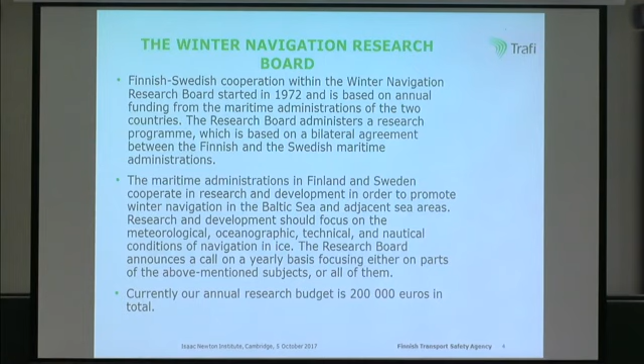The research and development which we are funding should focus on the meteorological, oceanographic, technical and nautical conditions of navigation in ice. The research board announces a call on a yearly basis, usually in early summer, focusing either on parts of the above mentioned subjects or all of them. Currently our annual research budget is about 200,000 euros in total.

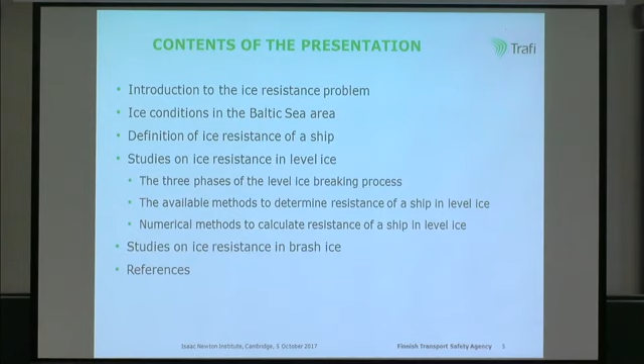Here you can see the contents of my presentation. I will first give a short introduction to the ice resistance problem, show a picture of ice conditions in the Baltic Sea area. I will discuss the definition of ice resistance of a ship, and two issues are the main subject: firstly, studies on ice resistance in level ice, and then I will also present one study on ice resistance in brash ice.

In practice, ice resistance of a ship can be determined by tests made in full scale, by tests made in model scale, by using calculations, by using empirical formulas, and also by using numerical methods based on physical models. Model testing and use of empirical formulas are important to ship designers, whereas the scientific community is more interested in developing real physical models. Full-scale testing is important, both for verification of empirical models and physical models.

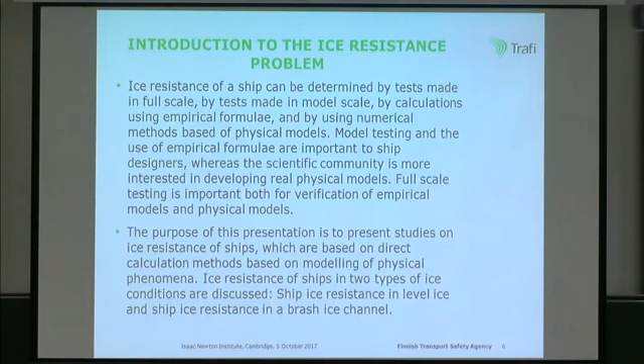The purpose of my presentation is to present studies on ice resistance of ships, which are based on direct calculation methods, based on real modeling of physical phenomena. Ice resistance of ships in two types of ice conditions are discussed: ship ice resistance in level ice, and ship ice resistance in a brash ice channel.

In this picture you can see an ice chart made by the Finnish Meteorological Institute showing typical ice conditions in winter time in the Baltic Sea area. You can see Finland over there, Sweden, Denmark, Germany, Poland, the Baltic Sea states and the Russian Federation.

And as you can see, in this case, all the ports along the Finnish coastline are surrounded by ice. That is the reason we need several icebreakers to assist cargo ships to our ports during winter time, and also why there has been special interest in research of winter navigation in Finland.

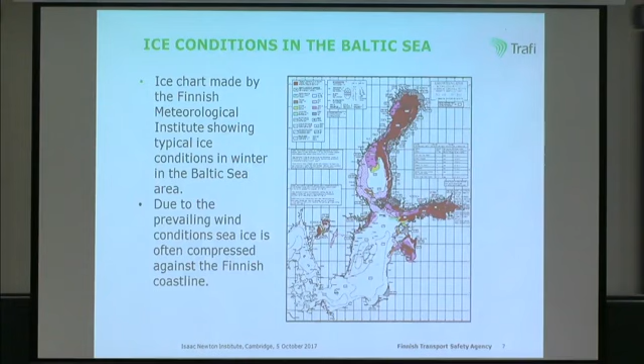The reason that the ice is usually packed against the Finnish coastline is that during winter time southern and southwestern winds are the prevailing wind conditions. That is the reason that usually ice conditions are heavier along the Finnish coastline compared, for example, to the coastline of Sweden.

In archipelago areas where we have fairways, we have brash ice conditions. If you have a fairway and ships sail through the same fairway during the winter time, we get this kind of ice rubble, which consists of different sizes of ice pieces, usually with a rounded shape. During the winter period more and more ice accumulates in the fairways, and that's a certain obstacle for shipping as well.

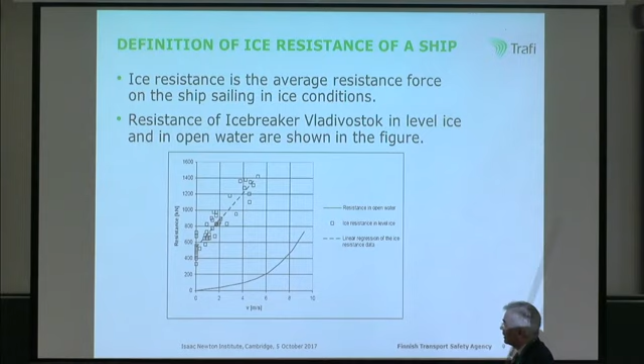Some words on the definition of ice resistance of a ship. Ice resistance is defined to be the average resistance force on the ship sailing in ice conditions. In this picture we can see ice resistance data from full-scale tests for the Russian icebreaker Vladivostok. These are the measurement points. We can see that there is a certain scatter in these results, and usually the ice resistance is assumed to be linear, averaging the measurement points.

So the ice resistance is linear, at least at relatively slow speeds, whereas the open water resistance curve shown here is non-linear, especially at higher speeds.

In Finland, usually the idea has been that ice resistance is separated from open water resistance. So if we have total resistance in ice, we subtract the open water resistance from the total resistance and get the ice resistance.

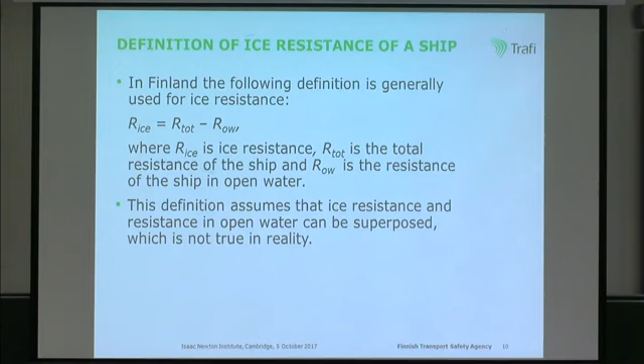This definition assumes that ice resistance and resistance in open water can be superposed, but actually this is not quite true, although the error might not be that big, because the open water resistance usually at very slow speeds is not very high.

Level ice seldom exists at open sea because the ice field is in continuous motion due to wind at open sea, but we have level ice in the archipelago area. For ice-breaking ships, the highest speed of a ship in level ice is an important measure of the ice-going capability of the ship, and this is very often defined in the ship's contract.

For example, the ship may be required to break 1.2 meter thick level ice with a certain bending strength when the speed of the ship is 2 knots. This is a very typical definition in a ship's contract.

We can separate several phases in this level ice breaking process. When the ship is approaching the intact ice sheet, the ice sheet is first broken. We call this the breaking phase. Then this broken ice floe is rotated so that finally it leans against the hull. This is the so-called rotative phase, and then after that the ship is gliding over this broken ice field, and we call this the sliding phase.

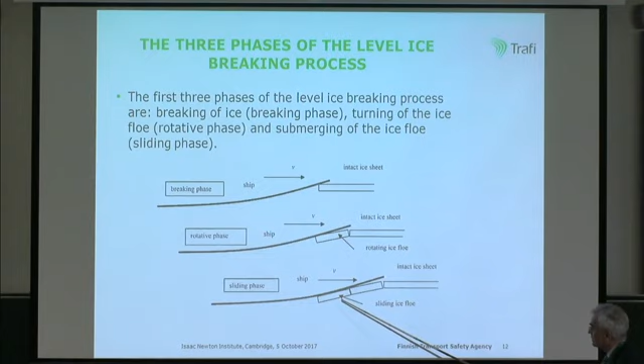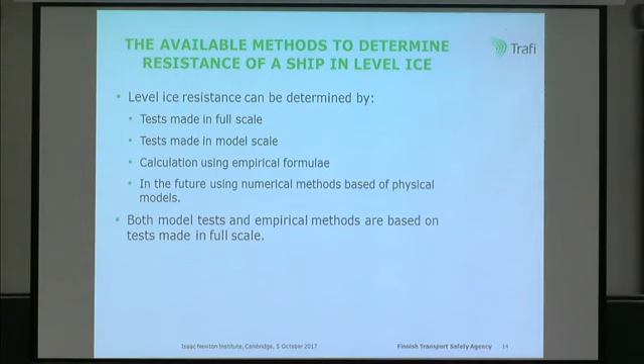As I mentioned, there are several means to determine the resistance of a ship in level ice. But now I will discuss numerical methods to calculate resistance of a ship in level ice.

Petri Valanto did pioneering work in this field at the end of last century. Later on, Fernando Puntigliano made some tests and also a thesis on the issue concerning the sliding phase. And also I made my thesis in 2007 on the ice sliding resistance.

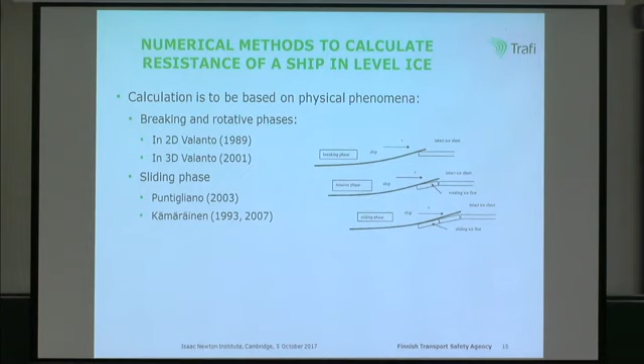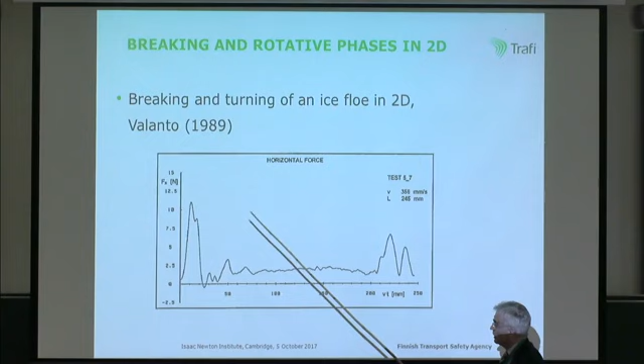Valanto made tests in 2 dimensions first, and here we can see the time history - actually this is the distance of the advancing ship - and here we can see the force when the ship is hitting the ice field and the ice is broken first. There's a huge force peak, and then this part of the figure represents the rotating phase, and the second force peak is generated when the ice floe hits against the hull.

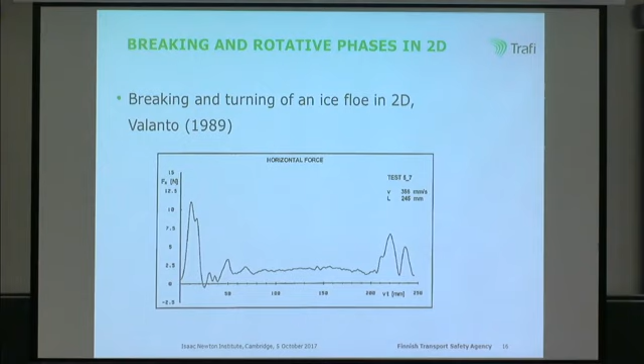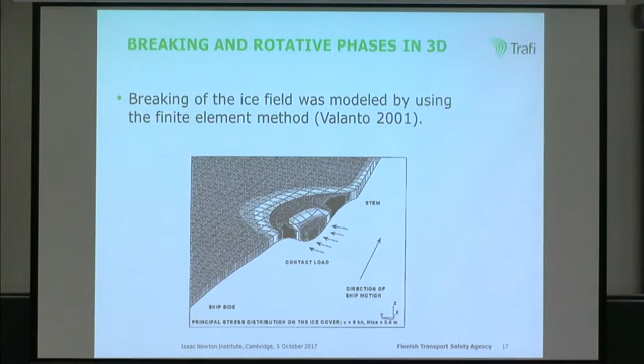So this type of force occurs in the ice breaking and turning phase. Later on, Valanto also made a 3-dimensional model so that the ice field was modeled using the finite element method, and the ice breaking was modeled in this way, and then fluid mechanics was applied to model the flow of water below the ice field and the ship.

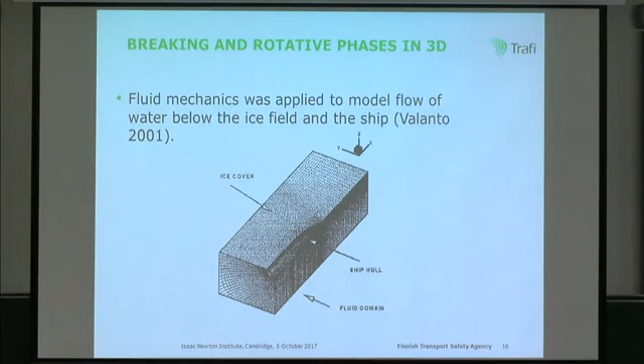So Valanto got certain results which did show a very good relationship with full-scale data. We have full-scale data resistance points here, these red dots. The lowest curve is actually an empirical curve indicating the ice sliding resistance, and the other curves represent certain forces due to the ice breaking, rotating phase, and when the ice floe hits the hull and so on.

So actually Valanto was able to model these phenomena, but he didn't discuss the ice sliding phase, which still remained an unsolved issue at that time.

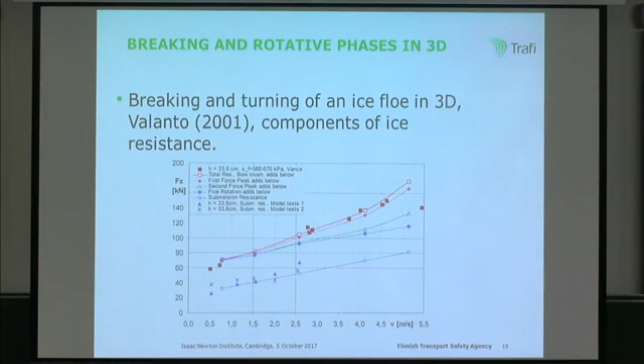Then later on, Puntigliano made model tests with a segmented model. He had a landing craft bow here, and he divided the model into several segments, and he had force transducers in these separate segments so that he could measure ice resistance for each segment.

He also had pressure transducers on the other side of the model where he could measure the pressure between the hull and the sliding ice floes in the ice sliding phase.

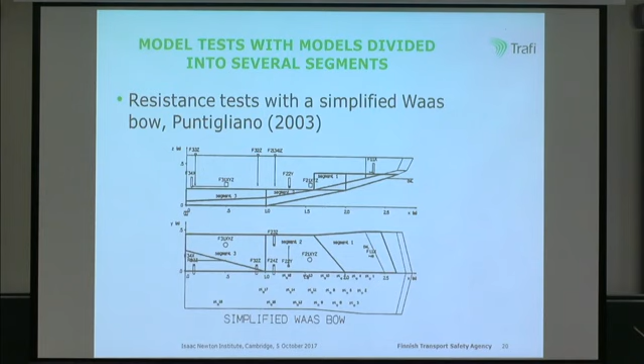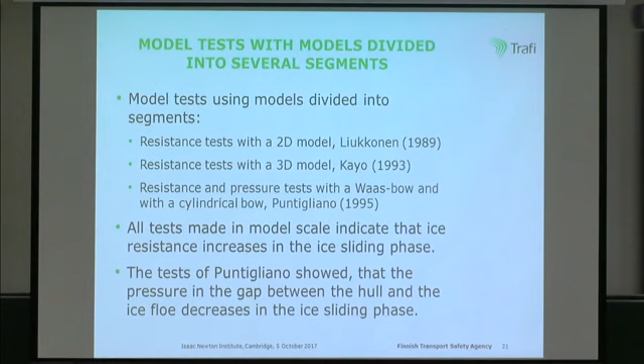Also, some other people made similar kinds of tests, and all tests made at model scale indicate that ice resistance increases in the ice sliding phase. Tests by Puntigliano also showed that pressure in the gap between the hull and the ice floe decreases in the ice sliding phase.

Now there are different theories indicating why the pressure changes in the gap between the hull and the ice floes in the ice sliding phase. It may be due to a change in geometry of the hull as the ship glides over the ice floes, and also inertia forces were indicated.

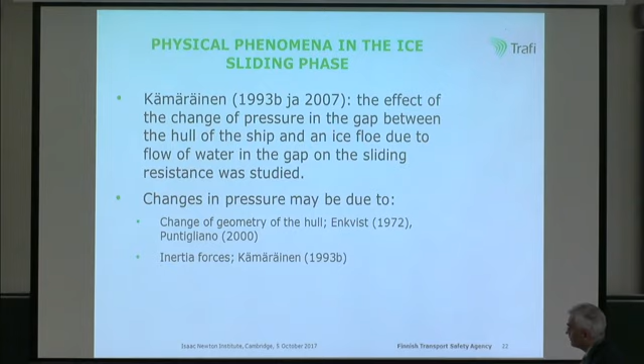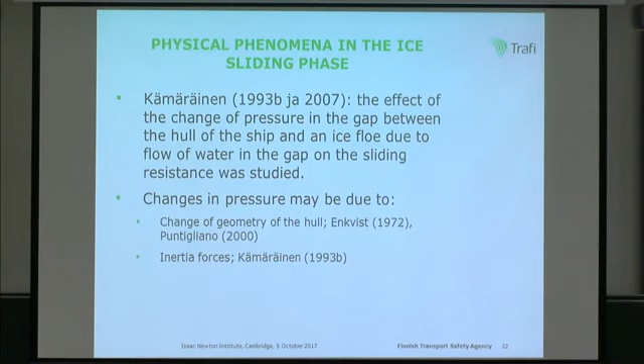I made a hypothesis in 1993 that inertia forces may be relevant, or should have to be taken into account, when pressure between the hull and the ice floes is calculated.

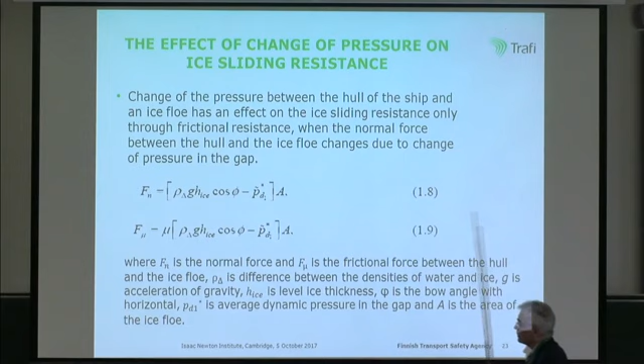If there is a pressure decrease between the hull and the ice floe, we have this PD here. We have the static pressure, which is the lift of the ice floe leaning against the hull. If the pressure difference is negative between the hull and the ice floe, then we get a higher normal force, and due to the higher normal force we get more frictional resistance. That might be the reason for additional resistance due to the flow in the gap between the hull and the ice floes.

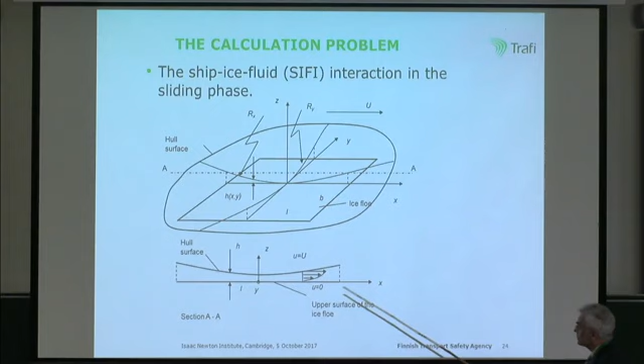Here we can see a section of this, the above figure. Here we have the hull, and here is the ice floe, and there is a certain flow generated by the movement of the hull above the ice floe. So the problem is to calculate what kind of flow actually exists in the gap.

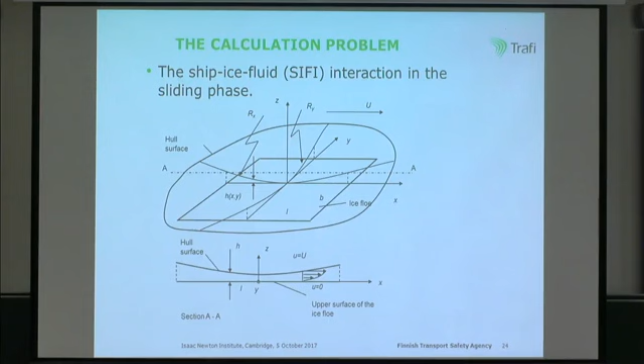I started from the Navier-Stokes equations, which were simplified by neglecting the momentum equation across the gap, because the gap is really small compared to the other dimensions. The remaining equations were integrated across the gap, giving the equations of Constantinescu. These are actually equations used in lubrication theory for special types of lubricants where inertial forces and also turbulence have to be taken into account. Usually in lubrication theory the flow is laminar, because otherwise lubrication may not be constant.

But in some cases, with special lubricants, this kind of theory would have to be used. This is applied in this case, because clearly at full scale, at least, the flow in the gap is not laminar but turbulent, and inertial forces also will have to be taken into account.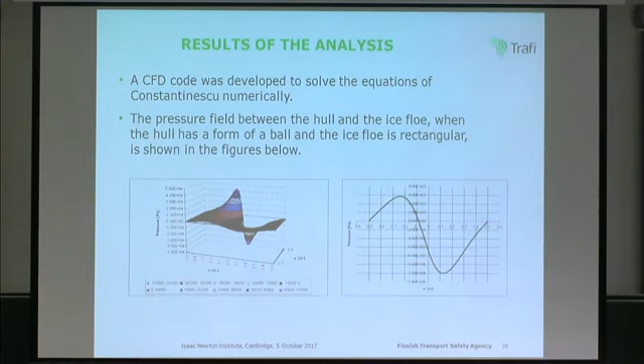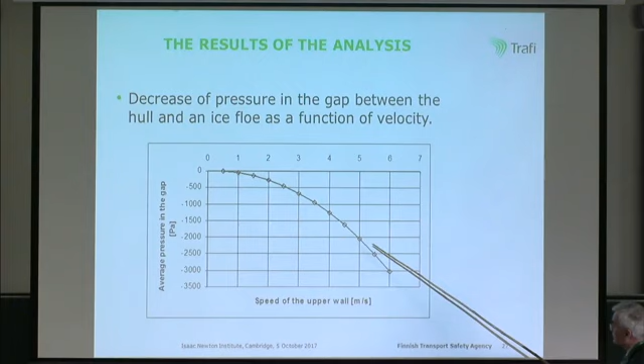And this negative pressure drop increases as the speed increases, something like that.

In this picture, the effect of low pressure on ice sliding resistance of a rectangular ice floe is presented. If it is assumed that the size of the ice floe is constant, then we go along this figure. But if we take into account that when the speed of the ship increases, the size of the broken ice floes also decreases,

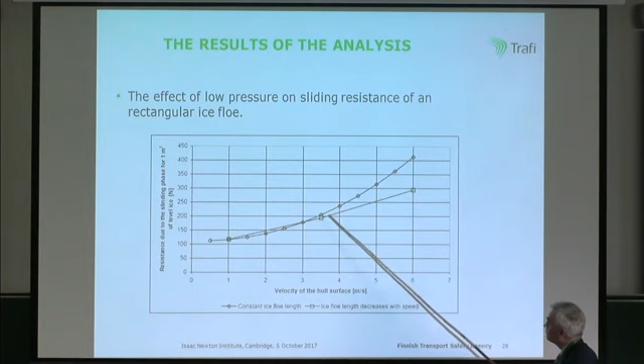which is a general observation in the ice-breaking process, this indicates that the increase of ice resistance is more linear compared to the assumption that the size of the ice floe is constant. So in this way it is shown that in principle this phenomenon may have an effect on ice resistance in the sliding phase, and it may also be that the increase of resistance with speed is linear, as indicated by empirical studies.

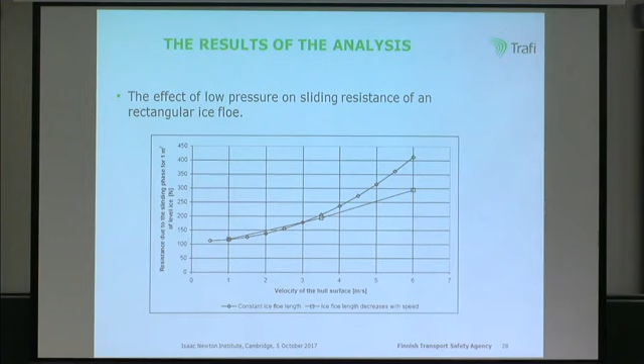So the conclusions of this analysis is that the inertial forces due to fluid flow in the gap between the hull and the ice floe may cause decrease of the pressure in the gap. Change of the pressure may also be caused by change of the geometry of the hull, and the low pressure phenomenon should be taken into account when ice sliding resistance is calculated, because the normal force due to the decrease of the pressure and frictional resistance due to this force in the contact point between the hull and an ice floe may be several times higher than the force due to static lift of the ice floe and frictional resistance due to it.

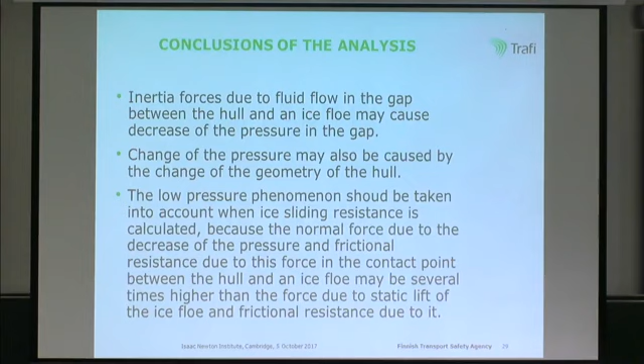This long sentence summarizes these conclusions. And of course there are some topics which require further research.

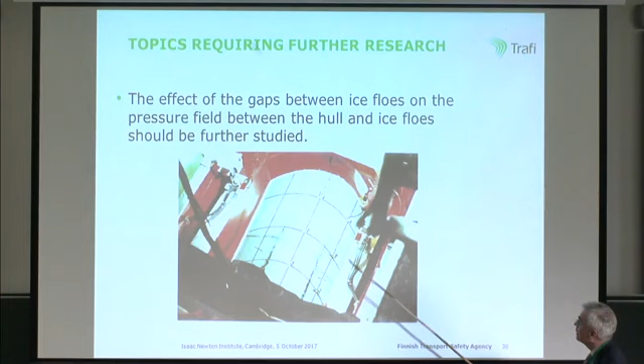In this picture you can see a ship model, and there is a window in the ship hull, so that when the ship is breaking ice in a model basin, we can see through the window the broken ice floes. And here we can see that there are gaps between the ice floes, and I think that the effect of these gaps between the ice flows on the pressure field between the hull and the ice floes should be further studied.

And then there are several other things. Of course, more pressure measurements should be made in full scale. Now we have only one set of measurements in full scale, made by Puntigliano.

Perhaps more tests should be done with segmented models. And then there are other issues.

Normally there is snow on level ice, and what is actually the effect of snow on ice resistance in level ice. And then air bubbling, the effect of air bubbling on ice resistance.

In the past, air bubbling systems were used in ice-going ships, which means that air is compressed, is directed by compressors below the waterline of the hull of the ship into the water, and the idea was to decrease the resistance of the ship in ice in that way. So that is one problem which could also be analyzed numerically.

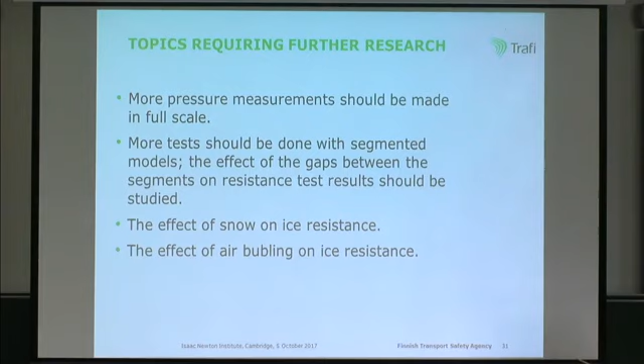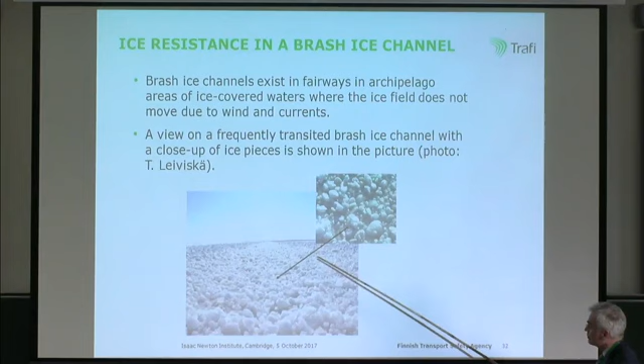So that was all on ice resistance in level ice, and then we turn to ice resistance in a brash ice channel. In this picture we have a view on a fairway which is full of brash ice, which may be even several meters thick.

This issue is actually related to the Finnish-Swedish ice class rules. The Finnish-Swedish ice class rules consist of three issues. Firstly, we have minimum propulsion power of ships in our regulations, and then strengthening of the hull and the propulsion system against ice loads. We have four ice classes, 1C, 1B, 1A and 1A Super, which is the highest ice class.

And according to the minimum propulsion power regulations, a ship having a Finnish-Swedish ice class should be able to sail independently, that is without icebreaker assistance, in a brash ice channel at a speed of 5 knots. The idea behind this definition is that because there are plenty of cargo ships annually in wintertime in need of icebreaker assistance, the authorities would like that cargo ships having an ice class should be able to sail in fairways in archipelago areas without icebreaker assistance. So that is the reason for this definition.

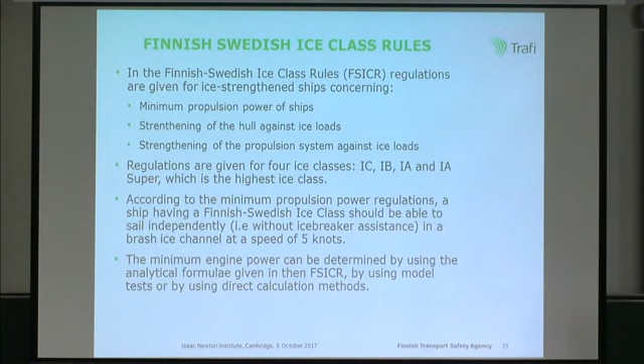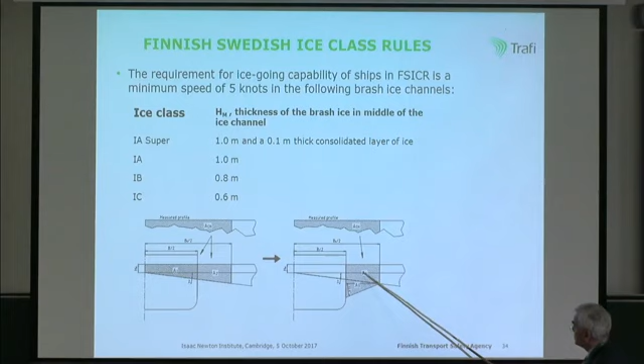In this figure we can see that we have defined certain thickness of the brash ice for different ice classes in the middle of the ice channel. This is half of the ship and this is half of the ice channel, and the idea is that this is the intact channel, and then when the ship is passing through the channel, the brash ice would be compressed aside.

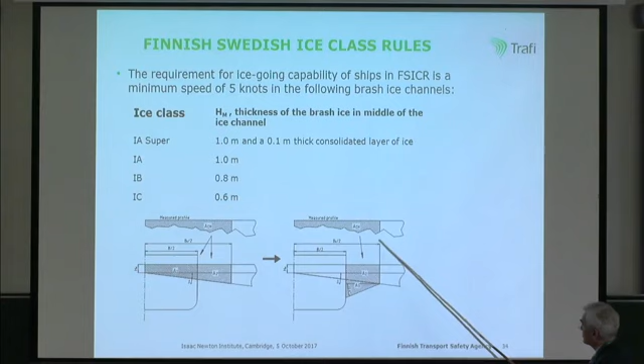Usually the ice channel is very thick in the boundary area because the ice tends to get thicker here, and also which makes that the brash ice is not, it's assumed that the brash ice is not able to be moved sideways below the ice, but it is compressed by the side of the ice channel between the ship and the side.

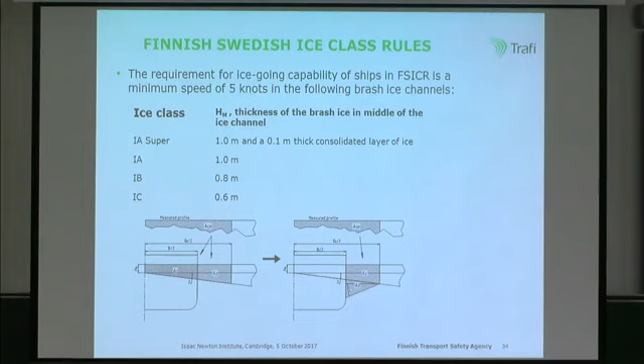We financed a study made by VTT, by Sorsimo and other research scientists to simulate the ice resistance of a ship in a brash ice channel. They used the discrete element method, and the real geometry of the hull of an existing ship at that time was used in the calculations.

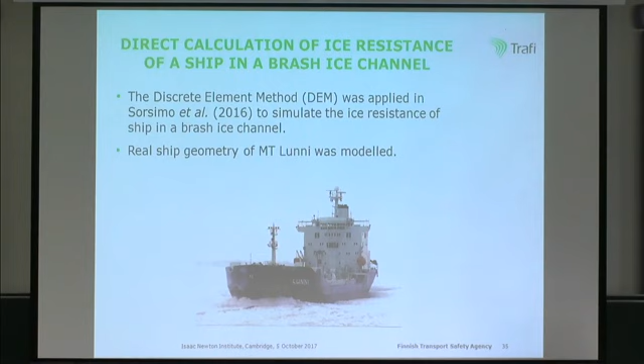In the simulation, the ship was moving unidirectionally in a brash ice channel, and the geometry of the channel was modeled according to the rules. The brash ice in the channel was modeled by a huge number of ice particles with a spherical shape interacting with each other and with the ship.

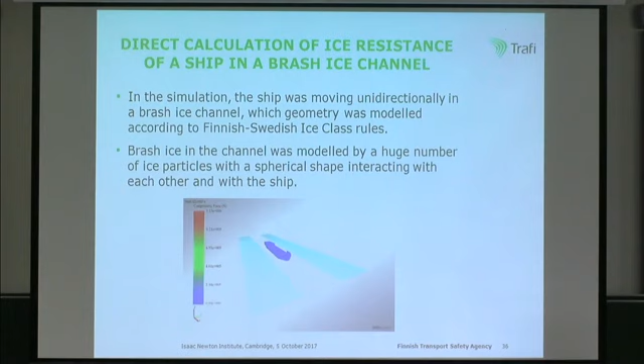Forces related to gravity, buoyancy, inertia and contact forces including friction, as well as fluid drag using a simple formula, were taken into account in the simulations. A slight freeze bond between the particles was also generated to mimic the cohesive forces found in reality.

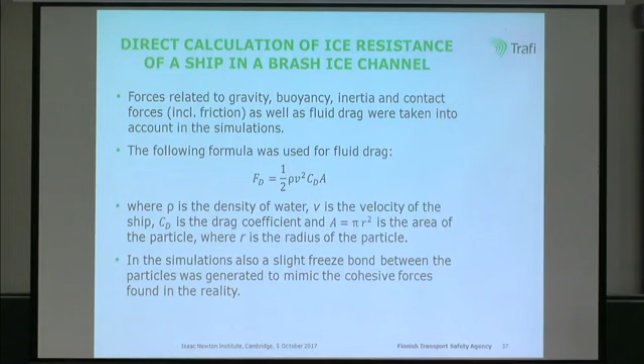The results indicated that the simulation of the brash ice failure process was visually realistic, corresponding to full-scale observations. However, the calculated ice channel resistance was substantially lower compared to the analytical study.

The reason may be that the major lack in the model relates to the model of brash ice and the evaluation of the material parameters, because the current parameterization which the scientists used refers to the ice rubble in ice ridges.

As the brash ice in a channel was created by spherical ice particles of the same size, the porosity also was higher than observed in experiments. That made the brash ice looser and therefore weaker, which also caused the implementation of the cohesive freeze bond between the particles to not produce any notable effect on the channel resistance.

However, as the user can model real ship geometry and define the channel geometry and material parameters of ice without considerable restrictions, we think that this DEM methodology itself is a promising basis for further development.

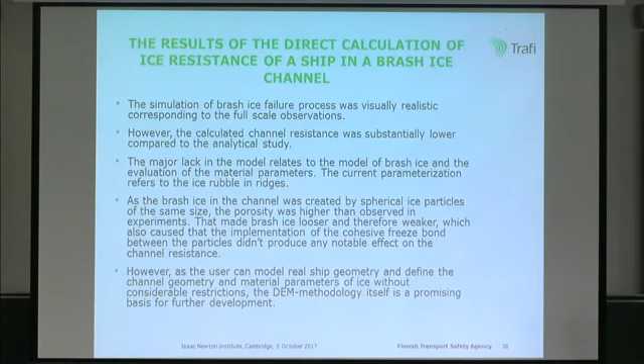Now we come to conclusions. We can say that physical models to calculate ship ice resistance in level ice have been developed, but a complete calculation model does not yet exist which would be able to calculate the total ice resistance due to the ice breaking process. In practice, empirical models are still used to calculate ship ice resistance in level ice.

The discrete element method has been applied to simulate the ice resistance of a ship in a brash ice channel. However, the physical model still needs to be refined in order to get satisfactory results. So the scientific community is invited to further develop the ideas introduced in this presentation.

My idea always has been that we should leave some research also for future generations, and for that reason the work is not complete yet. There is plenty of space for people to continue in this field and hopefully get even better results.

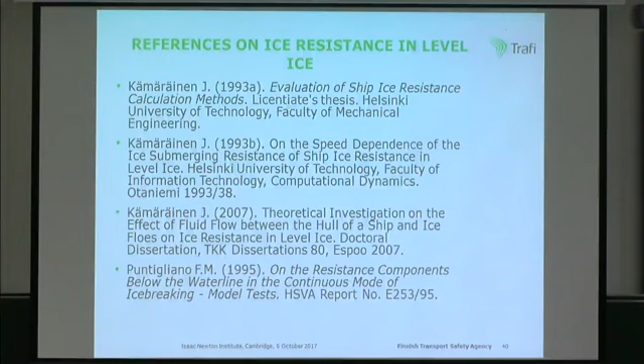I have also listed some important references at the end of my presentation: my studies of Puntigliano and studies of Valanto concerning level ice resistance, and then references to studies on ice resistance in brash ice.

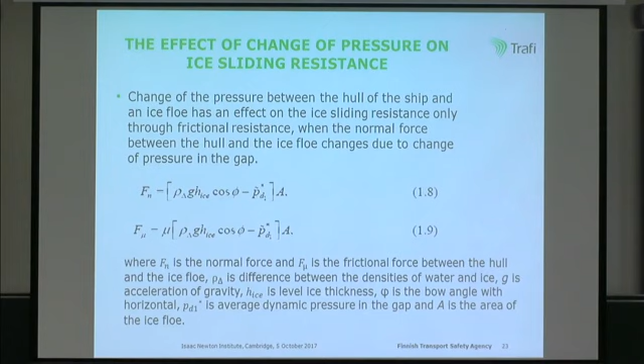You showed some solutions in the middle there, by Constantinescu and others, of the boundary layer equations, essentially between ice and the hull. I wanted to ask, have you got any velocity profiles that come out of the system? You mean this one? More, maybe the next, a bit further on. Yes, those. So it's the nonlinear lubrication equations, or the boundary layer equations.

So do you get velocity profiles out of that, and is there sort of flow reversal? Do you have any flow separation in this interaction with the flows? No, these equations do not take that into account. The gap really has to be small enough in order that these equations apply.

But you can have flow reversal, that was the question. Yeah, that is one possibility also, and that's one important issue which should be studied further. I didn't really study that in detail in my analysis. You've got a nice adverse pressure gradient, favourable and then adverse, which suggests there might be flow reversal on the sides. Yeah, that is a valid point, really.

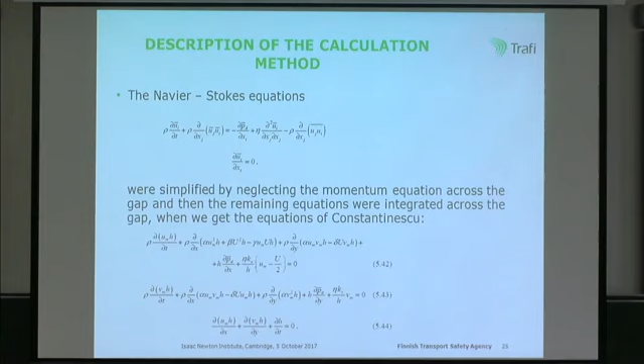I was quite struck by the photograph of the floes on the underside of the sea ice, underside of the ship. I had a naive idea, which you'll probably tell me is wrong. I was wondering if you'd designed the bow of the ship to be concave near the front. When the floes go underneath the ship, they could be steered away from the underside, so they wouldn't collect like that, and that could reduce the sliding resistance. Is that a possibility? Yeah, of course.

It depends on the ratio of the dimensions of the ship. What is the beam? How deep is the draft of the ship? It depends whether or not the whole hull is actually covered by ice. Usually, if it's a bigger ship with a deep draft, you may see ice pieces on the sides of the ship, not on the bottom area, really. So the ratio of the main dimensions, beam and draft, is important with regard to how it looks.

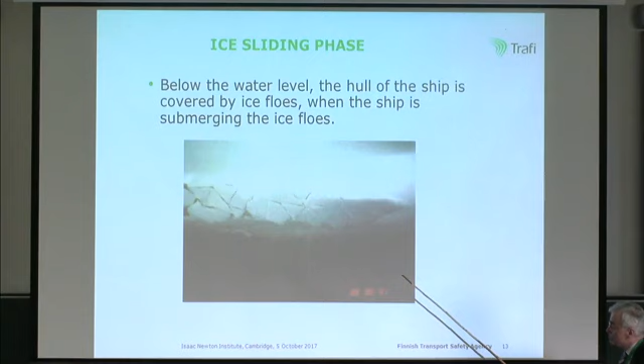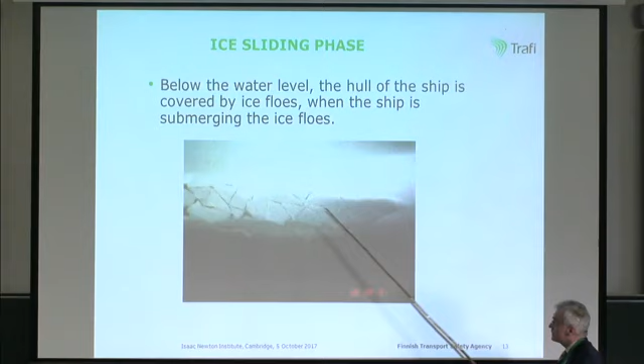But actually this has been also verified in full scale. In the 1960s, when the issue was studied for the first time, people had an icebreaker and sailed in level ice, stopped the ship, and sent a diver down there to look with lights how it looked. They explained that the ice floes were really leaning against the hull, just like in the model scale.

But if you had a concave hull, could it steer the floes away from the hull? Yeah, there have been different kinds of hull types tested, and if you have a very wide bow... there have been ship designs where the bow is wider than the ship at the midship, for example, which means that in those cases it may result in a different kind of coverage of ice floes along the hull.

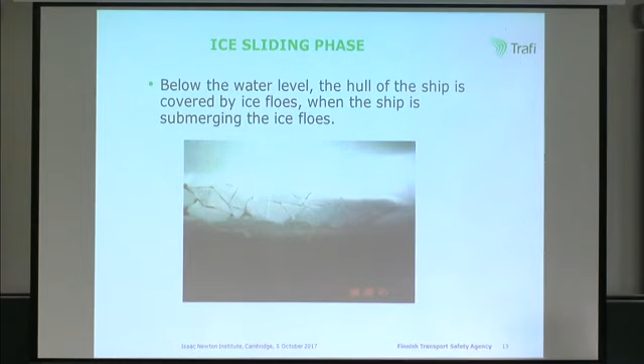My question about brash ice: you modeled that ice by spherical particles, many of them. Did you try, or do you think it's reasonable to model it instead as a viscoelastic layer, or with other conditions, like was explained by Hayley Shen, who asked you the previous question? She showed a model where brash ice is considered as a continuum medium with certain characteristics, instead of many particles. Do you think that's reasonable?